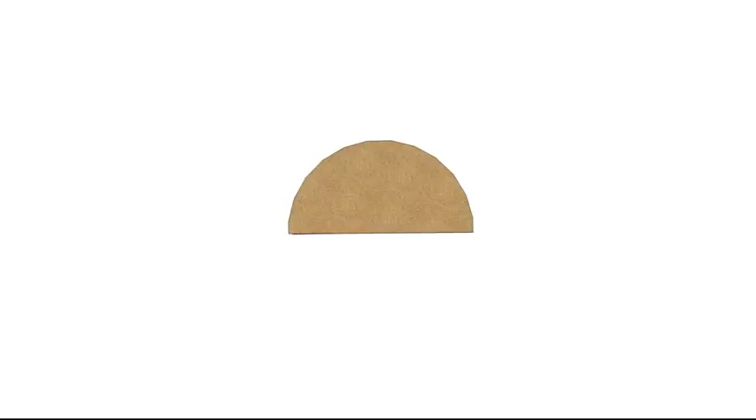If I cut the cake in half and remove half, then gradually turn the cake through 90 degrees, I can begin to see the filling. When I've completely turned the cake at 90 degrees, I can now see the two layers of sponge, the jam and the cream, but I can't see the top and the bottom of the cake. This is said to be a pure section. A slice through to show just the cut line, nothing in front, nothing behind.

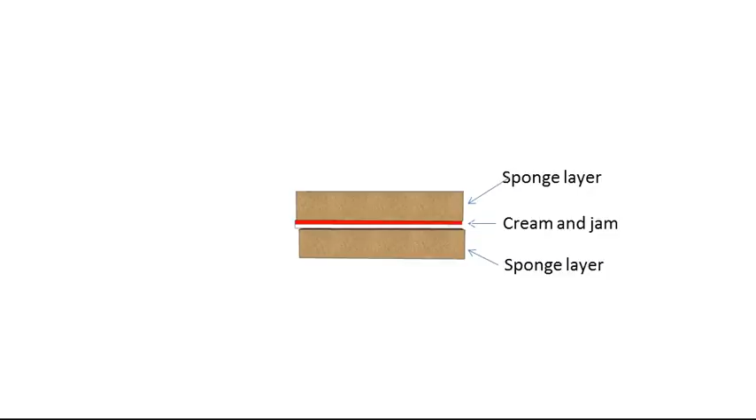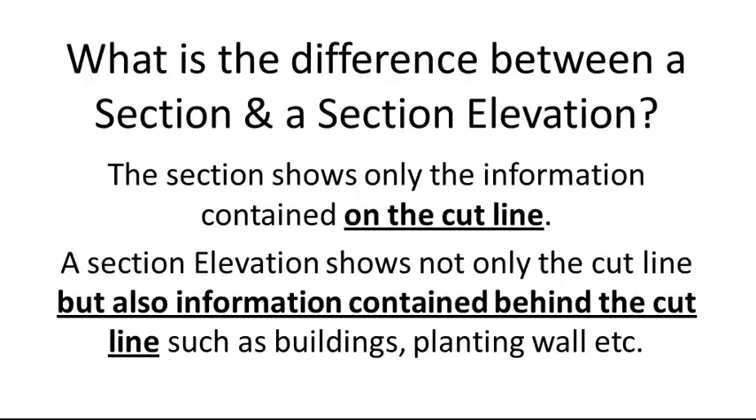So what is the difference between a section and a section elevation? Well, a section shows only the information contained on the cut line, while the section elevation shows not only the cut line, but also the information contained behind the cut line, such as buildings, plants, walls, etc.

So why is this useful in landscape design? In landscape terms, sections help the designer visualize the shape of the garden and the slope, if any, of the land. If the plot is steeply sloping, often a designer will take several slices through the site to show a detailed profile of what the garden is doing in terms of the overall levels that may affect the design.

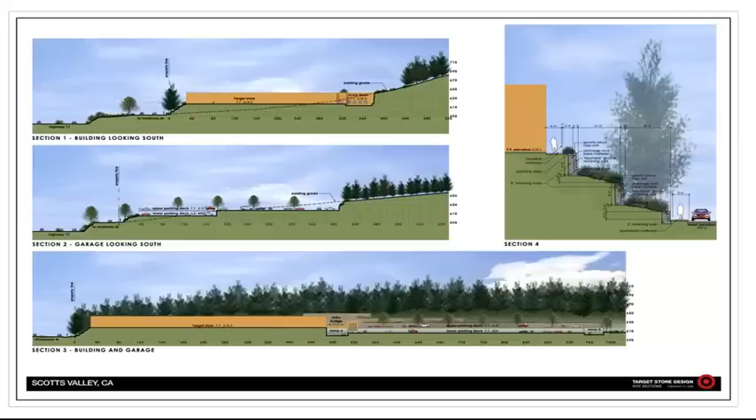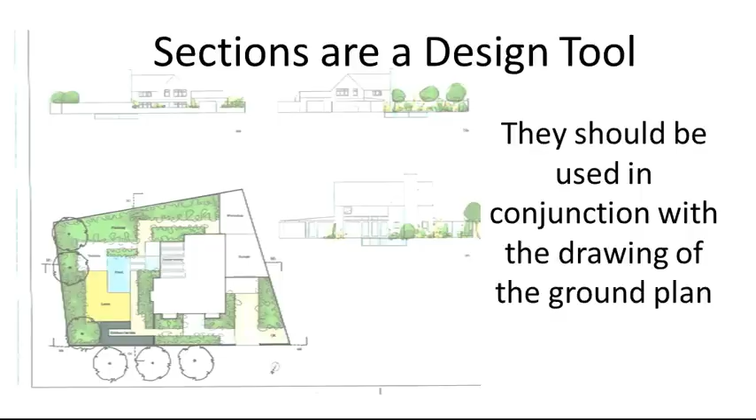Sections are a vital design tool for the garden designer. They should always be used in conjunction with the creation of the garden plan to make sure all the level changes are taken account of at the initial planning stage. All too often, sections are used as part of the sales tool, used to help sell the plans to the client. But it's vital that the designer understands levels before they start the planning stage of the design process, and therefore before you start designing, you should always draw out a section of the site.

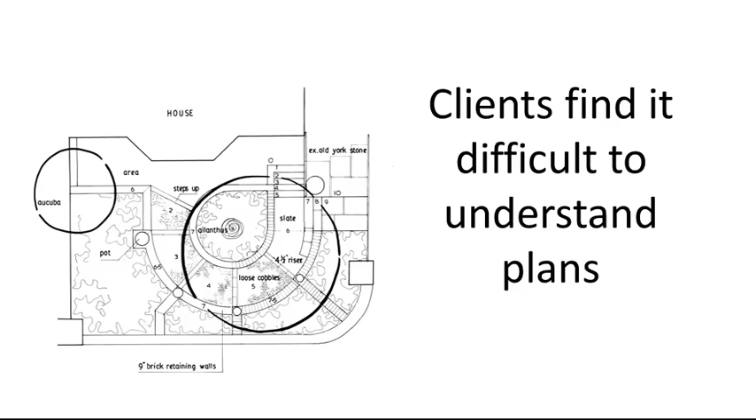It should never be underestimated how difficult some clients find it to understand a two-dimensional flat sketch plan. Even the contractors who are used to reading plans need more information than just a floor plan before they can quote or build the garden. Plans only ever show the ground plane. You have no idea whether the site is flat or indeed steeply sloping.

Understanding the approximate levels before you begin is vital if the plan has any chance of working. You don't need to know exactly the heights, but an understanding of whereabouts in the garden the land rises and falls will at least permit the designer to add steps and retaining walls where required, even if they don't know their precise heights.

In this Chelsea Flower Show garden, designed by John Brookes for the Financial Times in 1971, the ground slopes from front to back, from the bottom right-hand corner to the top left-hand corner. A trained designer will spot the fact that there are two distinct levels, divided by a retaining wall with two flights of steps, one to the left-hand side, and one to the right.

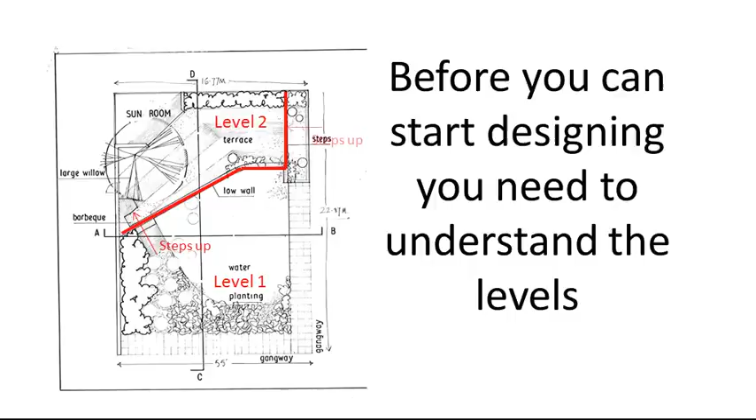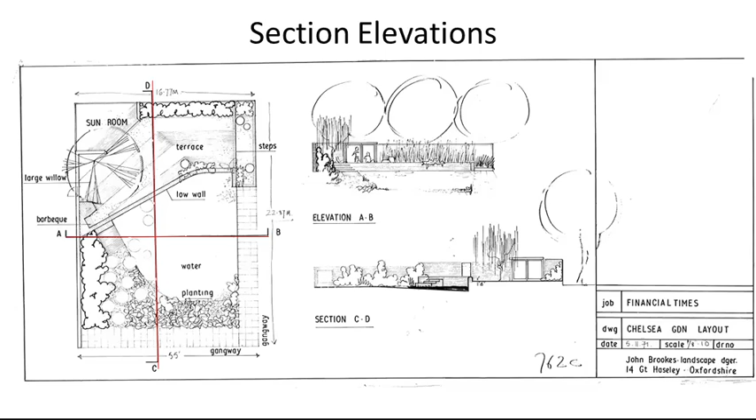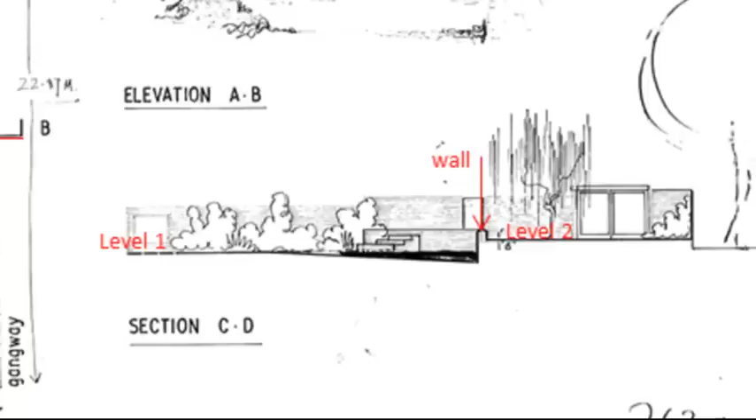Two section elevation cuts have been taken with this plan to help illustrate the change of levels. Line AB and line CD. Line CD is the easiest to understand as it clearly shows the two levels, the position of the wall as well as the depth of the pond. You can tell from the section elevation that the pond is deeper at the wall end and slopes upwards to the planting to create a beach effect.

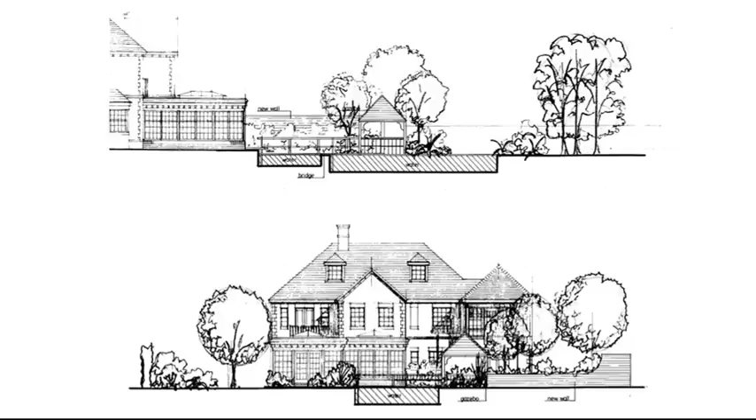Sections can be used to show both the heights and the depths, such as trees and ponds. If you have access to the architect's drawing, you can use these to help draw in the buildings and then add the trees and the planting to the foreground.

So how do we create a section? First, take your site survey and decide where the most useful cut lines are to be taken from. Remember, you can take as many sections from your drawing as necessary. Here, we'll use section BB. The triangles below indicate which direction the section is facing.

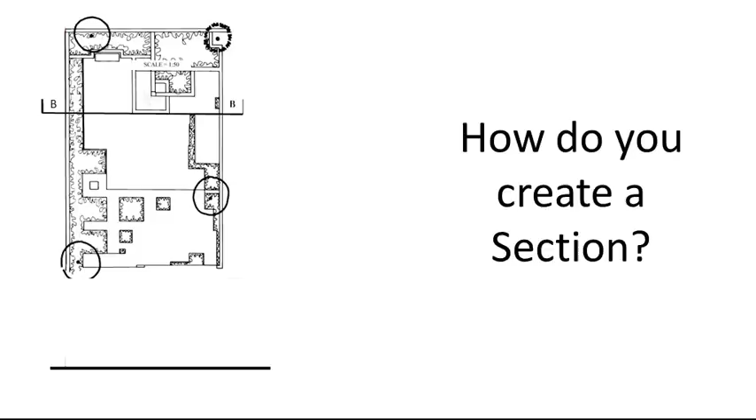Underneath the survey, I'm going to draw a line which will represent my soil level. Next, I'll project down the side walls from my survey onto my baseline. Now, using my scale rule, I'll measure 2 meters at a scale of 1 to 50, which is the scale of the plan, from my baseline and draw in my side walls. Remembering that because I'm cutting through the walls, I'll also be showing their thickness. As this is a section elevation, I'll also be drawing in my back wall.

Next, I will project down all the points behind the cut line I want to show in my section elevation. Having done this, I will now use my scale rule to mark off the heights and depths of the features behind my cut line and draw them in to my section below. As the designer, I will decide what looks best in terms of scale and height. When we come on to SketchUp in a couple of weeks' time, we will find this decision-making process much easier and quicker when using computer modelling.

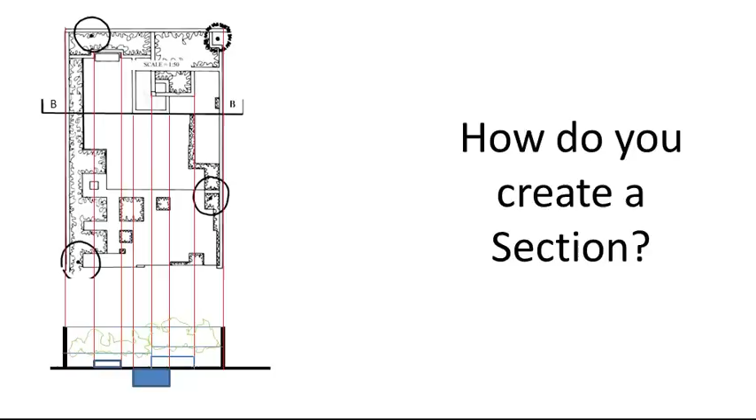In the next section, you'll see section BB, which looks back at the house and the indoor swimming pool. The indoor swimming pool is not attached, but is linked through with a path, and here we can see that there is stone balustrade in front of the pool and also a stone pergola with an entrance to the garden in the centre with 2 steps down.

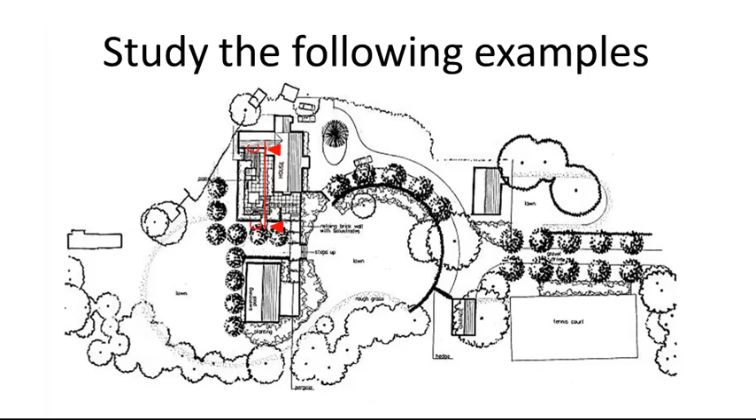Finally, the last section shows the walled courtyard garden looking back from the house. Here you can see the wall, the planting, the raised beds, 2 trees behind the wall, and the gate into the back garden.

The last 10 plans are from John Brookes, with designs ranging from the late 1960s to the 1990s. Study these not just for the elevations, but look and learn from the designs themselves and see a true master at work.